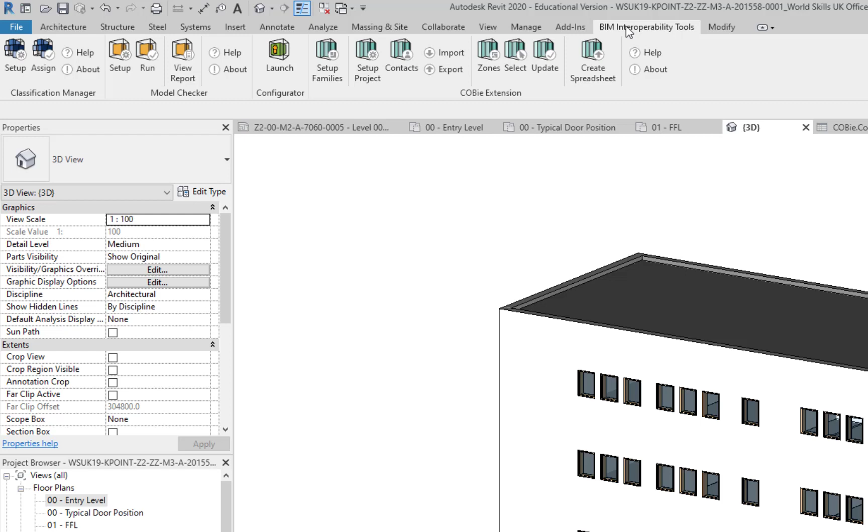So back into the model, and first thing we need to do then is within BIM interoperability tab, let's look at the COBie extension and say setup project. In this case I've actually provided the project setup, so if you say import and go and get the import project COBie settings, you'll see them within your resources file or data set that's been shared. If that's during the BIM competition, that will be available within your resources directory.

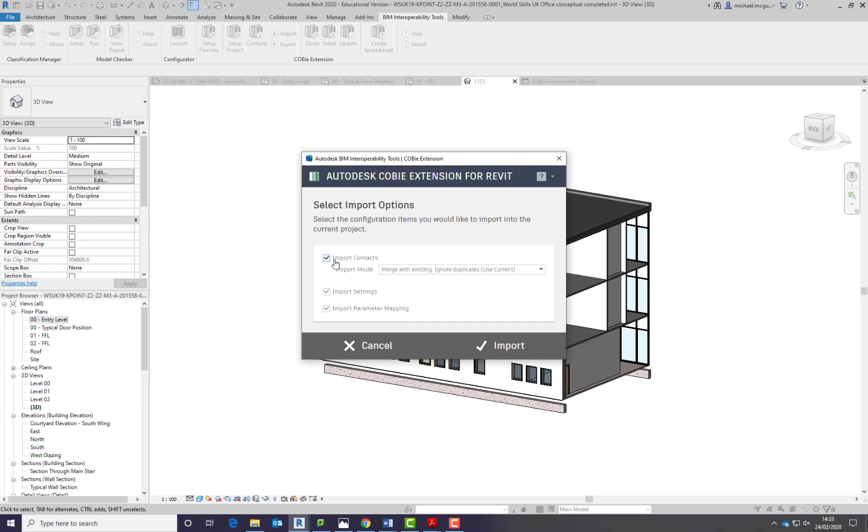And we can just say import to that. So let's import contacts and settings and parameter mapping. And we set up COBie project parameters first, so that when we assign the classification, the appropriate default parameters used by the COBie extension for Revit exist in the model, and we can assign them at the same time.

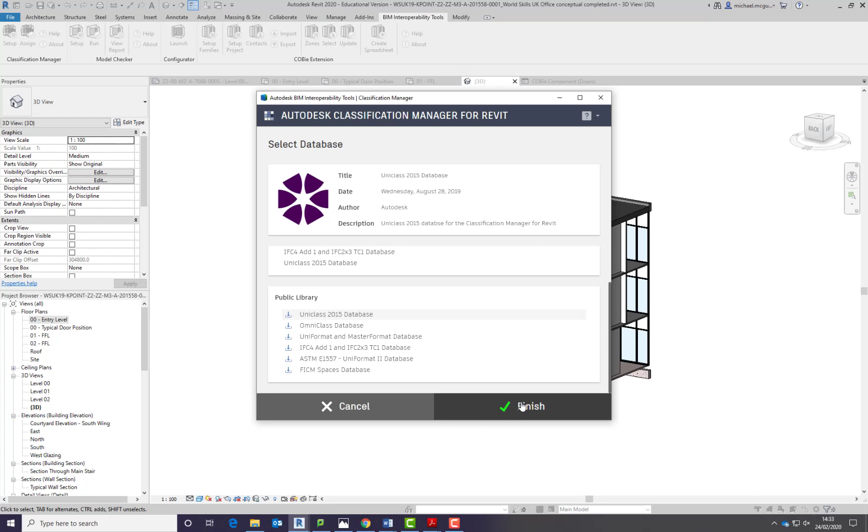So let's open up Classification Manager. We'll say Setup, and we're going to use Uniclass 2015 database for this exercise. Click Finish. And so that just loads in the Uniclass 2015 database into the project information model.

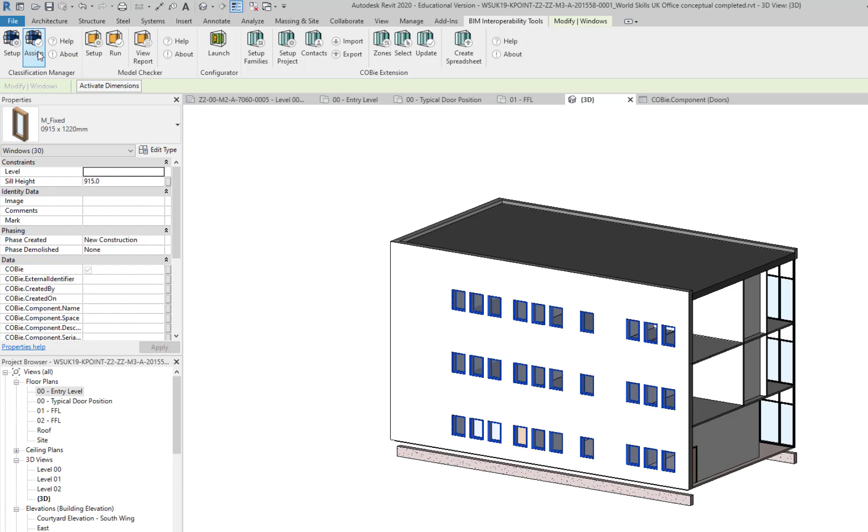So we now want to look in the model for any element that we wish to assign classification. So in this case I'm going to select this window and all instances visible in the view, and we can see the windows that we have selected. So we can now go to BIM interoperability tools, Classification Manager and Assign.

So assign classification, what we can see here, we have the EF elements and functions tables, the product tables, and Uniclass table SS, which is systems. Now we would normally use the EF table for windows and doors, and I'll demonstrate that soon in a little infographic. But for the benefit of this task, we're being asked to follow the BIM execution plan, and it's instructed us to use the SS table or the systems table.

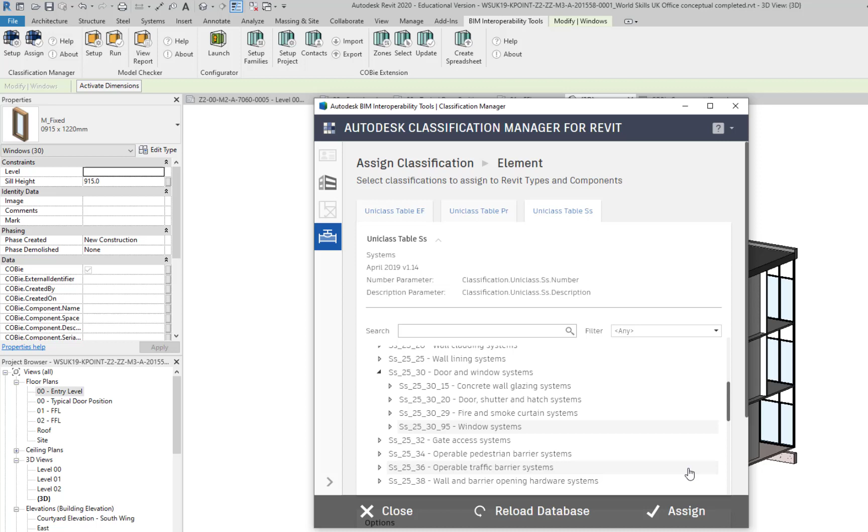So if we choose on the top tab, the System tab, and again we can look back to the BEP, and it says 25 30 95 for window systems. So let's find 25 and expand that, 25 30 and expand that, 25 30 95. And then I can just assign that. Before we assign it, let's scroll down the bottom. We should see three options.

So we can say assign similar classifications, so that's on. Set COBie parameters. Now that was the wee tip that I had mentioned a few moments ago. If we tick set COBie parameters, when we assign classification information, it will assign a classification to the appropriate default parameter used by the COBie extension for Revit at the same time.

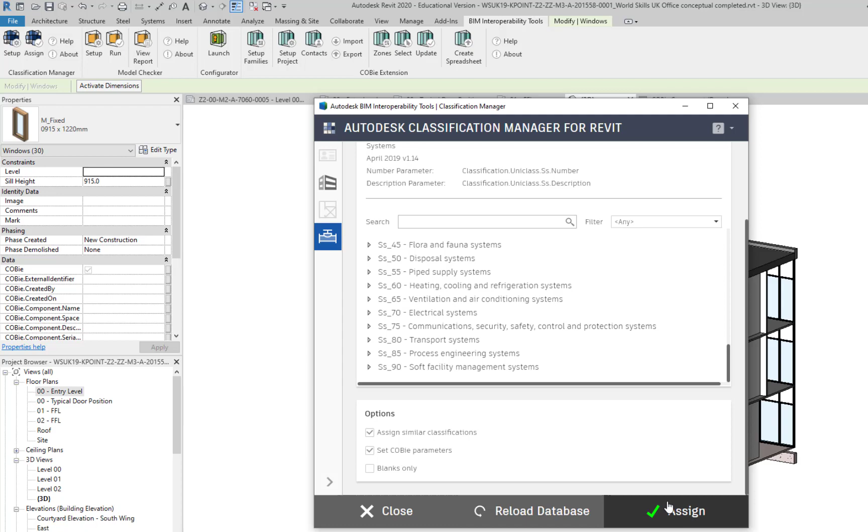And blanks only. Now if we already have classification information assigned to any elements, then if we tick blanks only, that information won't be overridden when we assign new information. If we don't tick it, then it would overwrite any classification information that's already been assigned. And so we'll just click assign to that.

And so back into the project information model, and using a crossing window and filter, let's check none and select only doors. So we have all the doors in the model selected.

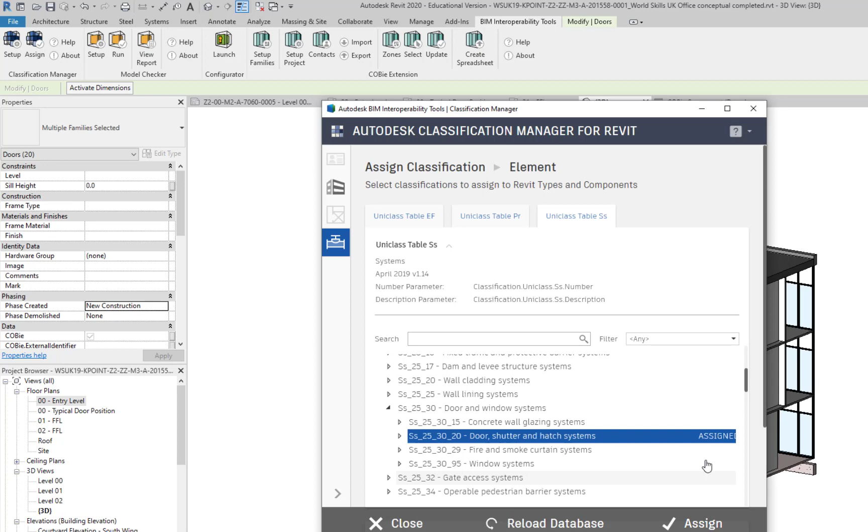And 25, 30, 20 would be the classification information. So assign from the classification manager, SS systems table. So we can say 25, 30, 20, click on that and say assign, and we'll see a little pop-up appears to say that it's assigned.

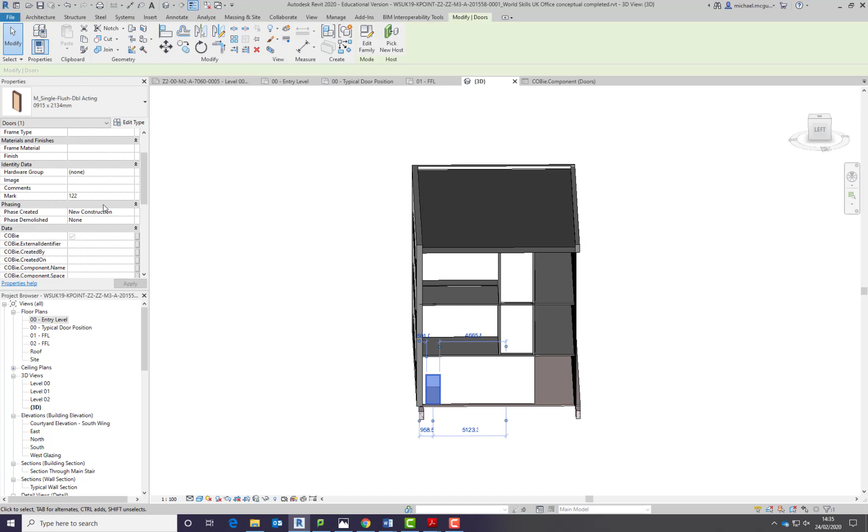Also, let's just go down and double check our options again, just to make sure that set copy parameters have been ticked, and again, because we hit assign already, we can just say close to that. So let's double check our classification information. Let's choose the door and go into edit type, and within edit type, we can see the classification information has been added in to the correct categories.

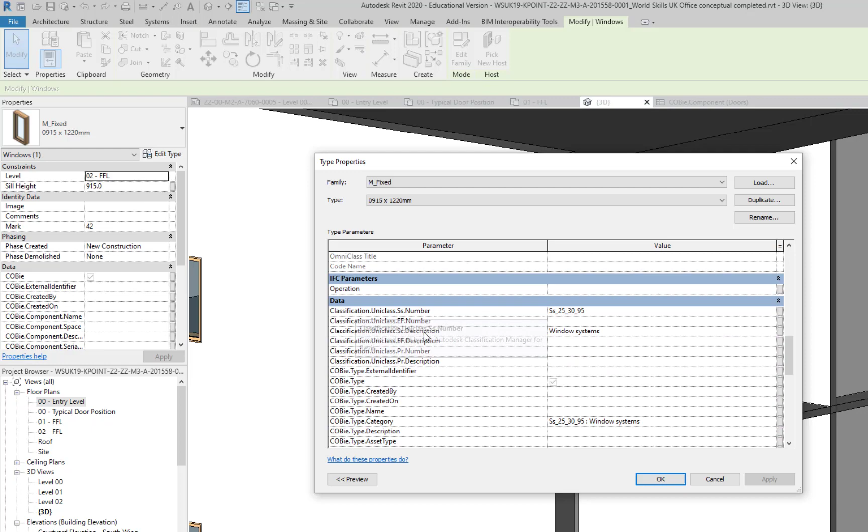So you notice it's not instance information. If we click edit type, we can see the information is type information. And there's the system classification information within the project element.

It describes the various tables that are available, so complexes. Complexes would be the buildings and all of the grounds, etc. Entities are the buildings. Activities, what type of activities happen in those buildings. Spaces and locations, again, what is happening within those spaces and locations. Elements, so this is the one I want to draw attention to. Elements are the main components of a building. Floors, walls, roofs, so also windows and doors.